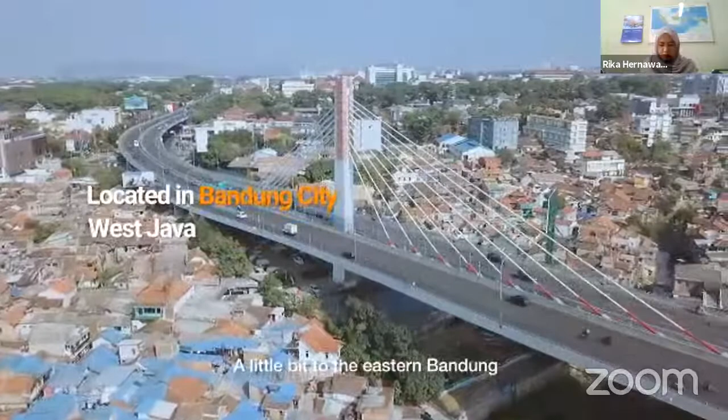A little bit to the east in Bandung, which was once renowned as the Paris of Java, we stand as a single campus, which is the center of a healthy student lifestyle. Our institution was born from honorable purposes and objectives from the founders of the Yayasan Pendidikan Dayang Sumbi, who believed that every one of us should be able to reach higher education and live a better life. The foundation still keeps its promise to provide high quality and affordable higher education for everyone.

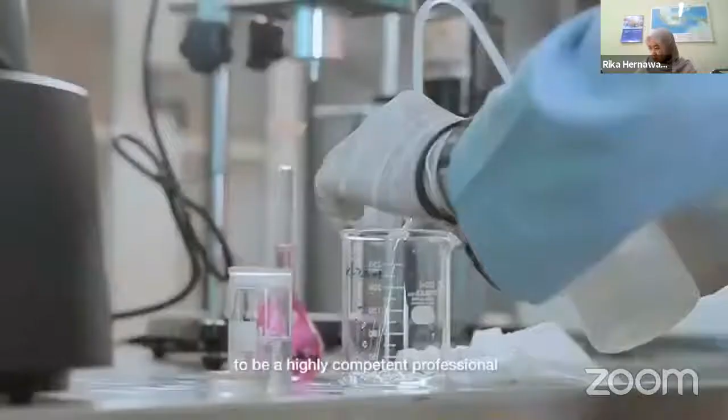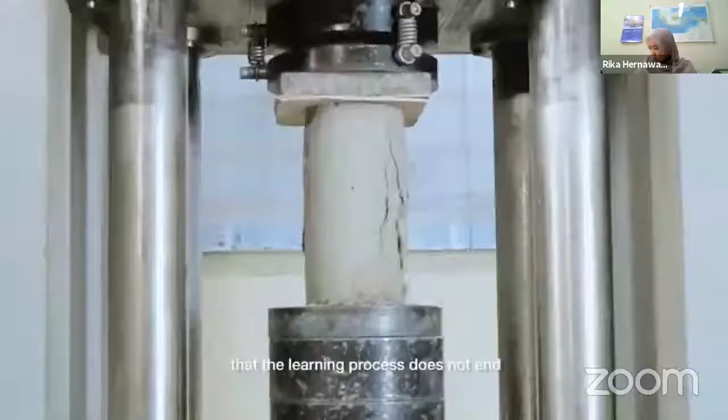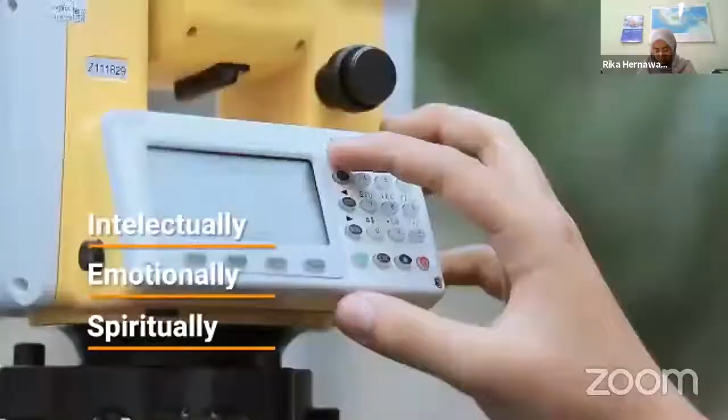Along the journey of education inside our campus, we aim to educate each and every student to be a highly competent professional ready for the workplace. However, as educators, we are aware that the learning process does not end with simply refining professional skills. We also work with our students to grow more proficient intellectually, emotionally, and spiritually. The independent spirit and curiosity for learning of our students and alumni is well known, and therefore they are certainly capable of contributing to society.

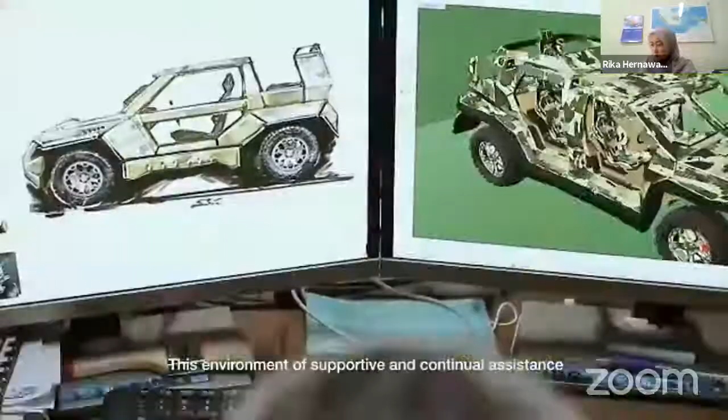We are an integrated learning space which allows every student to be their best, a culturally knowledgeable, passionate human being ready to take on life's challenges. We provide every chance to prove our students' passion in science competition, research, seminars, exhibitions, sports, arts, and every performance to truly express whatever character each and every one of them has. This environment of supportive and continual assistance has been proven to encourage our students in their accomplishment at prestigious national and international championships.

As independent as we are, our doors are always open for everyone who is interested in creating a better education to contribute more to society and grow together. We have a record in collaborating with many universities, government and private offices, companies and worldwide industries through our alumni, friends and relatives around Indonesia and around the world. Today, our alumni numbers over 20,000 people. Our proud alumnus is ready to contribute across the nation and all over the world.

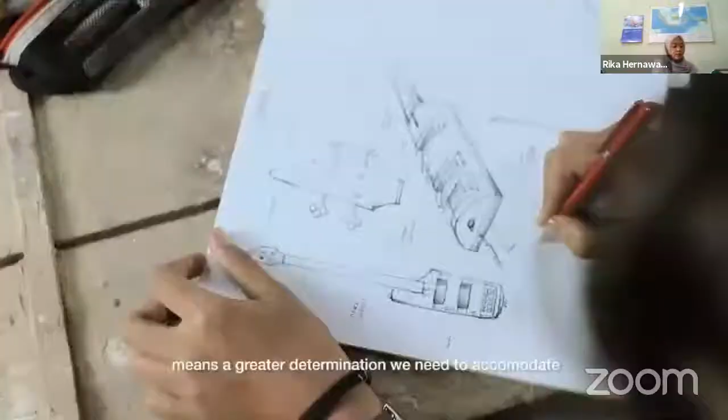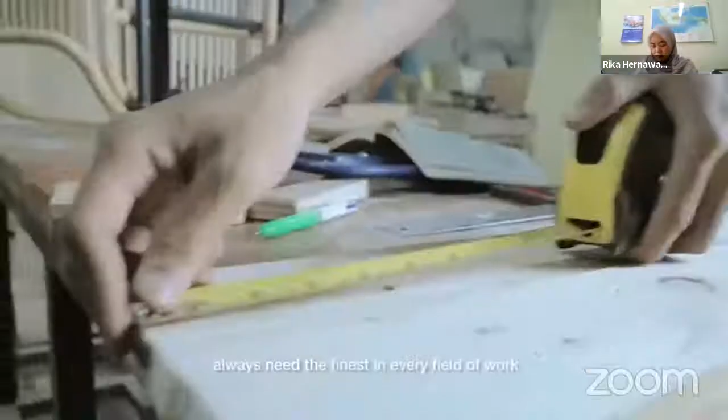The more graduates we have means a greater determination we need to accommodate in order to maintain our qualities. We understand that technology, science, design and engineering always need the finest in every field of work. Welcome to Institut Teknologi Nasional Bandung. We hope for a better mutual connection with you. Together, with your support, trust and cooperation, we can be an excellent and independent higher institution with the aspiration to build better human resources for the nation and the world.

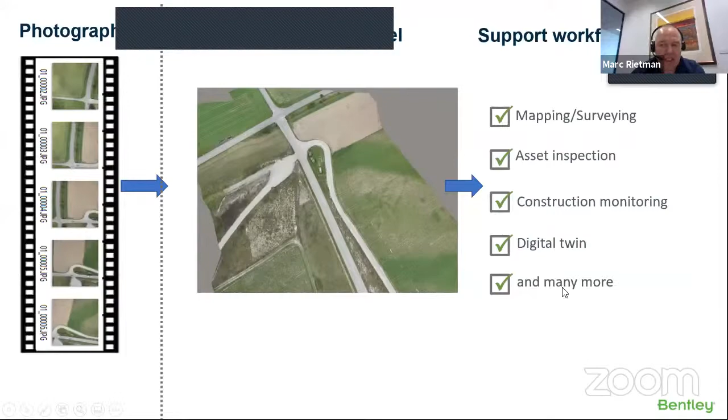In the design phase, for example, if you design an object, you need to understand what you already have there, so understand the existing conditions. Risk management is, of course, a big thing. So you can do the design on the mesh model.

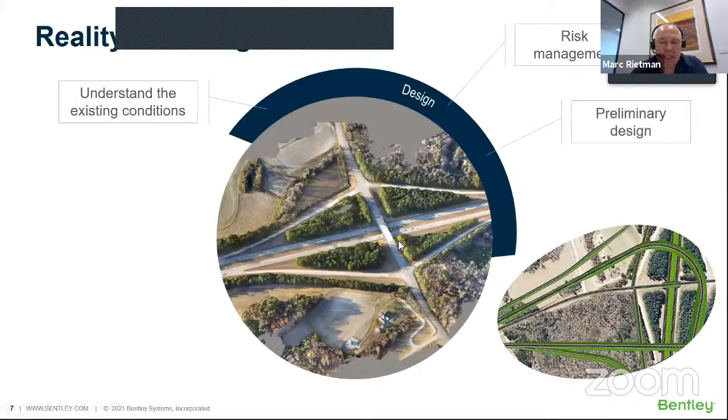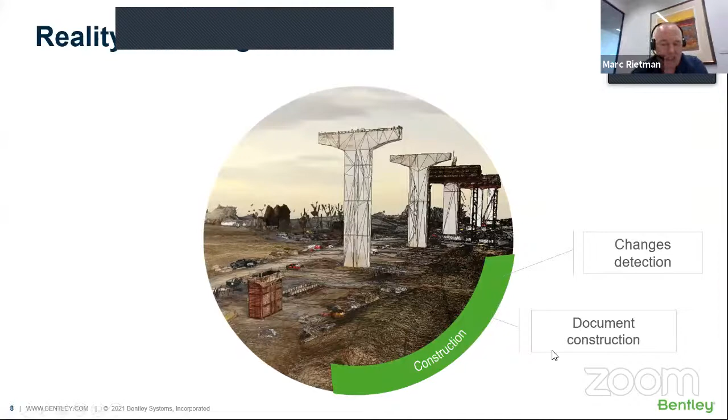In the construction, what I said before, change detection. Is the model really built like what the design was? Document the construction site. And if you go into operations, you can do training and simulation. Later we're going to show some models, for example, how to use it in a HoloLens. We can do virtual inspections and asset management, more on the side of the operation.

So how does the software work? What we do is create photos, and what's important, and we'll discuss that a little bit later, is the overlap from points. So we can do something like this.

We can do statues. People is quite difficult, I'll explain that in a minute. But you walk around an object. If you do it with a handheld camera, capture something from different angles, different rotations, and then you can model it.

Same with a drone. We have a lot of different types of drone capture guides, and it all depends on what you want to model. If you want to do an asset inspection, for example, on a cell tower, that's a completely different way of capturing than if you do a train site or mine site for volume calculations or for design. That's an important thing to understand, and I hope at the end of this session you get it, that it's not rocket science, it's not really complicated.

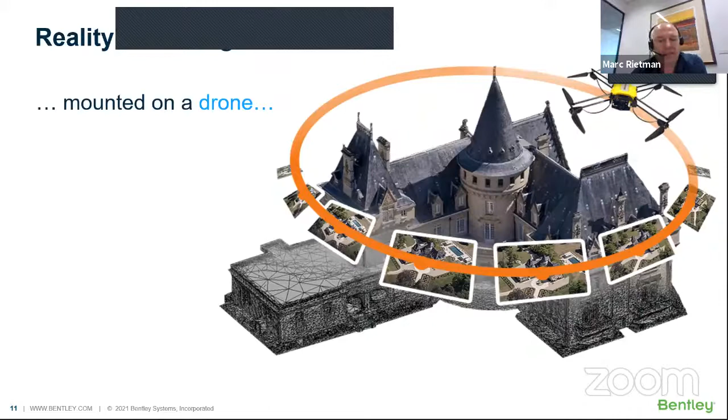You have to follow certain rules to get the model, the output that you desired. So that's an important one. You understand the output first, and then when you understand the output, you go back to what camera you can use. If you don't have a need for a high-end resolution mesh, you can use a lesser, cheaper camera, or you fly higher so you make fewer photos. That's all things you need to consider.

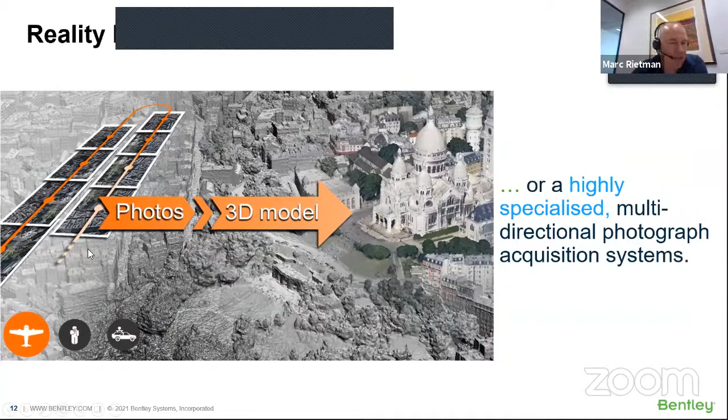And this is, for example, if you do city modeling. We had one of our users recently do a city, Singapore, where they fly around with a certain overlap, certain angles, and create a mesh model out of it. So again, some examples of what devices you can use, and as an output, you get a mesh model.

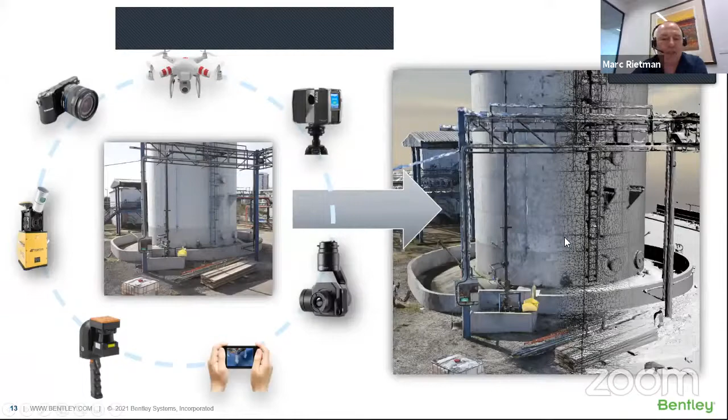Again, on the acquisition side of things, you need to understand how the software works. Basically what we do is stitch images together based on common points and on RGB values. So it's important that you have a texture in the model, and every point that you want to model needs to be in 3 photos. So it's important to have a lot of overlap. If you see holes in the model, quite often it's because there's no data, or a bad texture, which we'll explain in a minute.

Also, the capture technique defines the quality of the model. So you can imagine if, for example, on this side you have only 3 photos, that's maybe not as strong as if you also have photos from the other side, high and low. So the capture technique can make the quality of the model stronger.

So what we do is 3 steps. We have a process we call aerial triangulation, where we import the images, extract key points from them, and then start matching the images together. When we have that, we compare points to points for stitching, and then at the end we create a mesh and texture out of it.

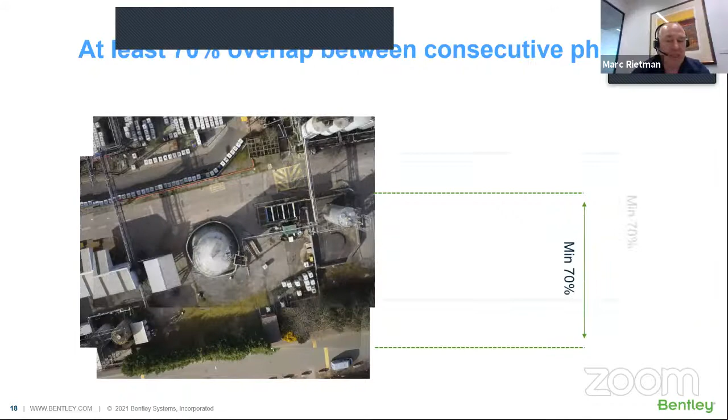So if you capture data, at least what we need is a 70% overlap. We suggest even more, like 80%, but that depends a little on what the capture technique is. If you do nadir images shooting vertical down, at least 70% overlap, though you can do less. I did some models with, for example, 60 and 40% overlap, using traditional survey images for historical mapping.

Government users have a lot of data. They want to create orthophotos or 3D models out of it for archive purposes, and we can use Context Capture for that too. But if you have less overlap, the model looks not really that great, to be honest.

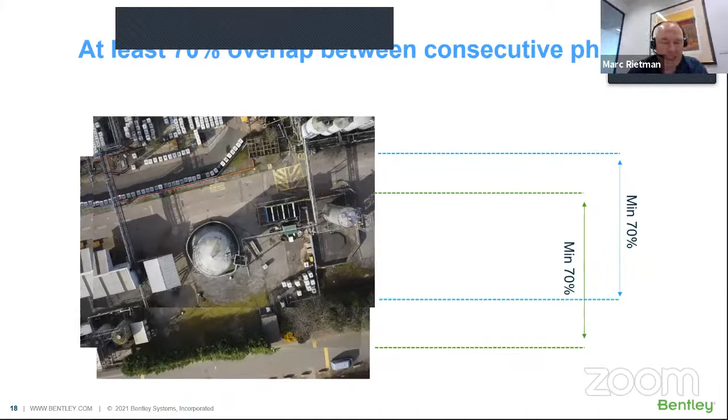What's also important is the angle difference between points. We compare pixel to pixel, but a pixel is not a point, it's a flat surface. So you can imagine if you have a point here, the flat surface on this image is different from that image. If that angle is too big, the software can't really stitch it together.

All of this comes with experience, but there's also something we can help with. We have a lot of different types of capture guides, and we can guide you through that process to better understand the issues you can have here.

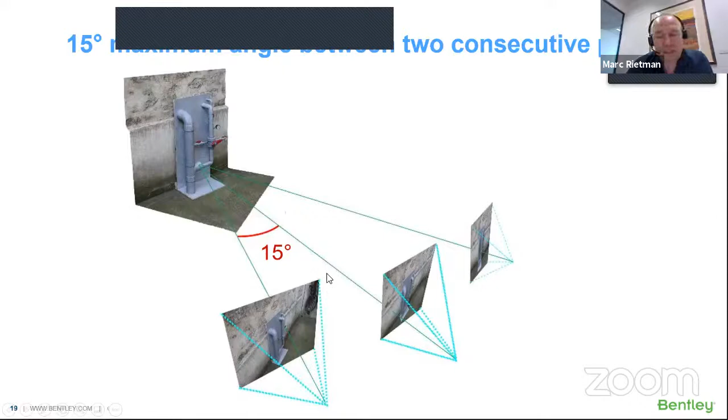An issue can be the distance to the object, the resolution difference. If you shoot from far away a point is, let's say, 5 centimeters, and from close by it's 1 centimeter - the same point, but the software can't recognize it as the same point. So what you need is some steps in between. This happens with the car example, but also quite often with buildings. If you fly really high, say 100 meters with a Phantom 4, and then go down to 30 meters, the software can't stitch these images together. There is a way to do it manually, but you try to avoid manual steps.

But if you do, for example, buildings, the best capture technique is still to orbit around the object, going around and shooting from different angles.

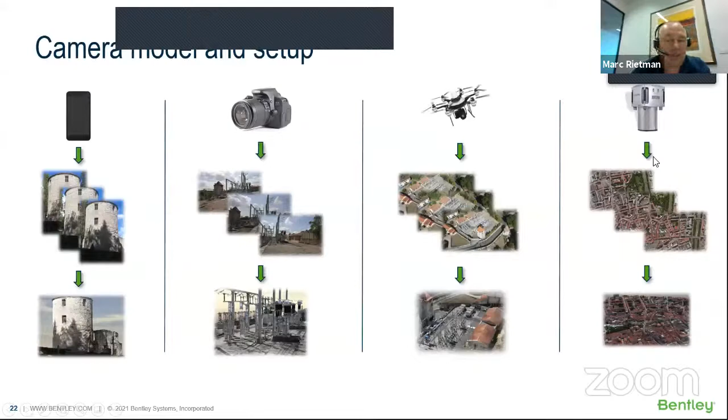So considering the time, the capture part is quite quick. This is something we normally do in a 1 or 2 hour workshop or training. There are so many different capture techniques and ways you can use to capture something - it depends on a lot of factors. So that's something maybe we can cover separately if there's more interest.

What I want to do now is show some examples from models. I've got some videos where I captured these models, so I can also show some live, considering the time.

This is a city model from one of our users, Aerometrex. Bentley bought Acute3D, the French company, in 2011 - well, actually we bought it in 2015, but the software started in 2011. This user was already using it before Bentley, I think since 2012. So they are really experienced - one of our best users doing this type of modeling.

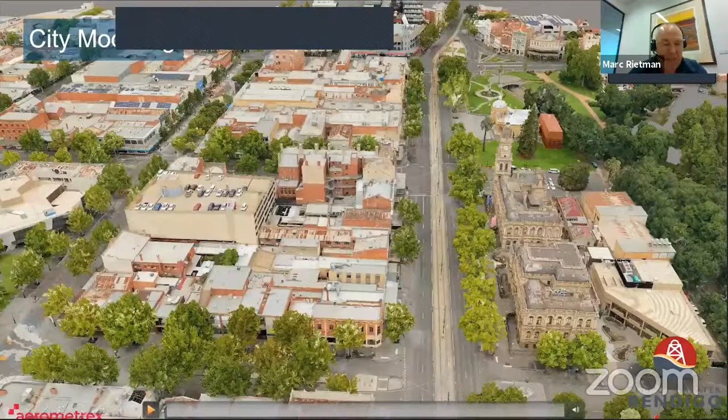When I start playing the video, you'll recognize why I think that. First of all, you hardly see any cars in here. What they do is process the data, take it out, clean it up, and reprocess it again. That's quite manual and time consuming, but it makes the model way better - the quality is more photo-like than what you'd get from a typical reality mesh.

This one is also available online, so if you Google Aerometrex and Bendigo, or Pau in France, there's also one of the models. They have a lot of stuff available online.

The way they capture in general is with a helicopter instead of a drone, so it's easy to get access above cities. You hang out of the helicopter, shoot a lot of images, plus handheld capture. You can use devices mounted on a car, and in general Aerometrex is just walking around with handheld cameras shooting, then later merge the two data sets together.

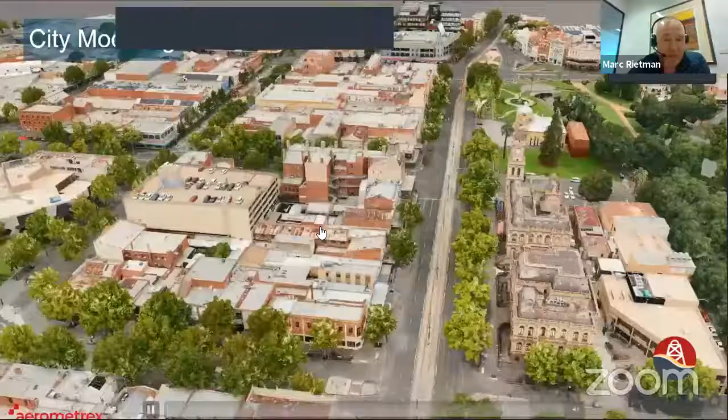What they are using this for is brick replacement. They want to do inspections off-site from the brick, and if it needs to be replaced, they can measure it - it's really scaled. They use a lot of ground control points for scaling, then prepare the data off-site and bring it on site for replacing the brick.

So this is a bit more high-end model capture, a different kind. This is quite common for a lot of these heritage users to get a quality like this, and also even doing it inside the building.

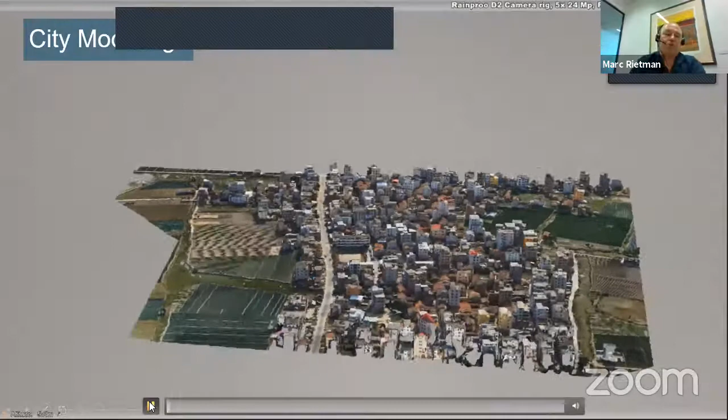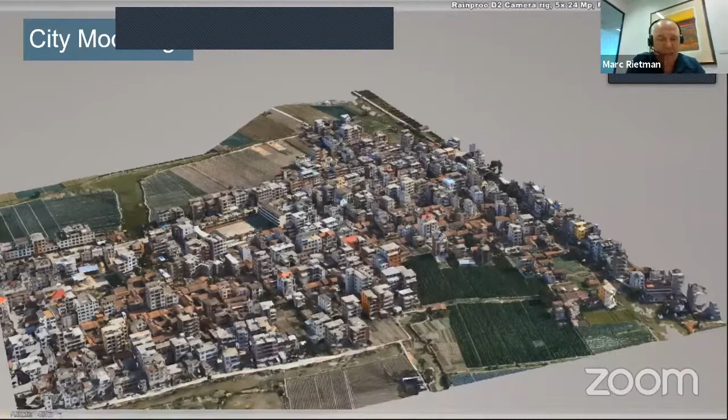So this is another example of how users are using ContextCapture. This model was created with a camera rig, so we have 5 cameras on a drone. You fly up and down like a normal nadir flight, but you shoot 5 photos at the same time - one down, one left, right, forward, backward. That's a camera rig model.

In this case, you can see it on the top right, it's a 5 times 24 megapixel camera, and they're flying 105 meters high, so the GSD is less than 2 centimeters.

If you want to do city modeling, you can do it with a single drone with a single camera, but then it takes you way longer, and of course there's more risk - something you forgot to capture. With a camera rig, you have less chance to forget something.

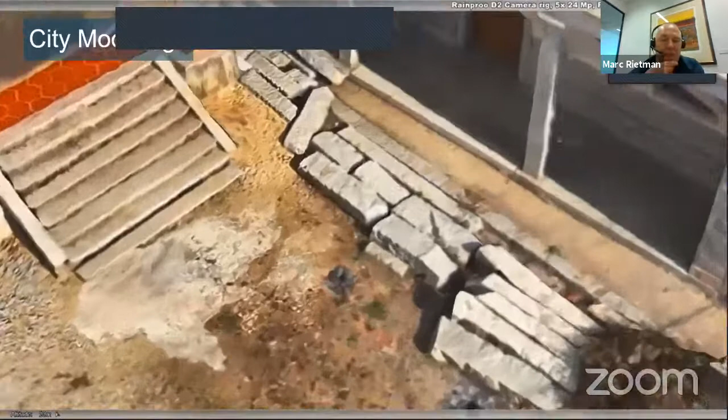The main thing is you do it basically at the same time. If you do it with a manual camera, you have to fly forward, backward, left, right, and do orbits, and the shadows will really move - you see really hard shadows here, in the colors. That's the advantage of doing a camera rig: you basically capture it at the moment that it is, you don't combine different times of day into one model.

Another use case that's really popular at the moment is doing cell towers. For inspections you need to climb up, you have to turn the tower off, and you need at least 2 people in Australia. In a lot of parts of the world it's just too expensive to do it all manually, so you can fly with a drone instead.

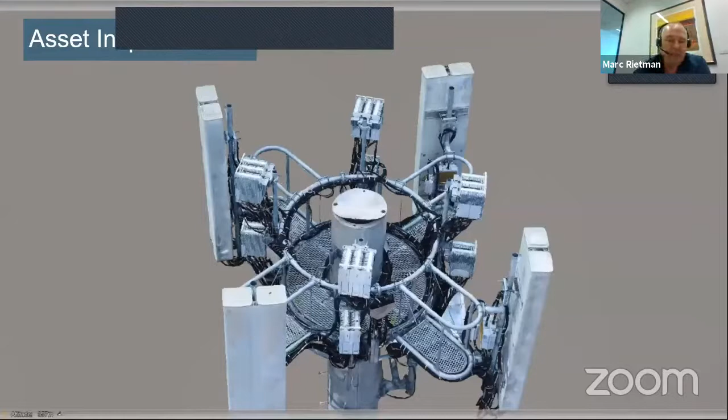This one I did myself with a Phantom 4 - 1400 images, flying around at different angles, and you get a model like this. This is something we are really good at with the software; we optimize the processing so in less than 10 or 11 hours of processing, we get a model like this.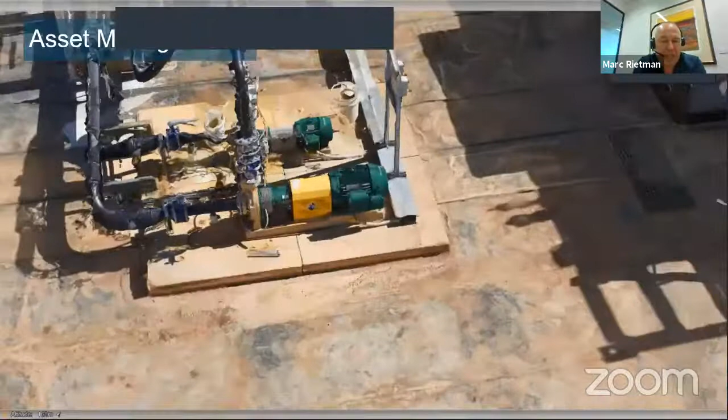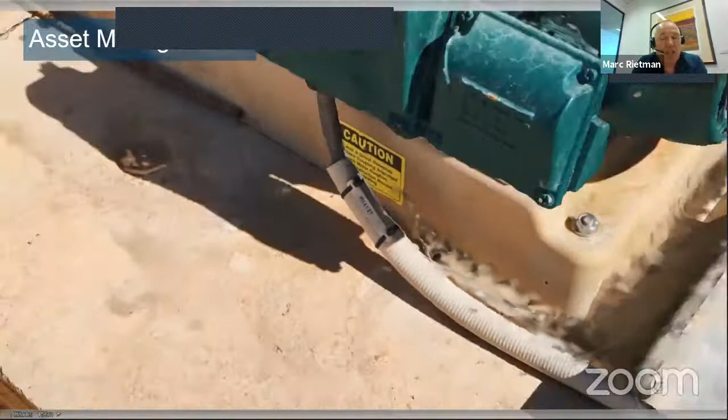This is really a digital twin example, but users in the office need to read these kinds of numbers and tags on the pumps. They don't really need the high quality model over the whole plant site - we only do the objects that they really need, which saves processing time and capture time.

This is an important thing, but if you want, we can do the whole plant at this quality. Let me zoom in - you can see, you can read what's on that object. This is really a digital twin example where people in the office want to see what's there.

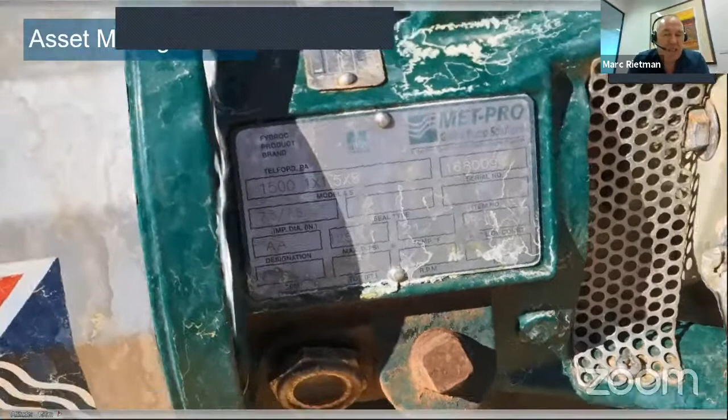We can attach sensor information here, or information about the pump, so if you click, you can see the maintenance forms.

There's a combination of drone and handheld capture. So flying a drone, flying handheld, capturing data with handheld, and combining it. There's a certain workflow that we can help you with to train on this. It's not so complicated as long as you can see points in both objects - that's important to understand.

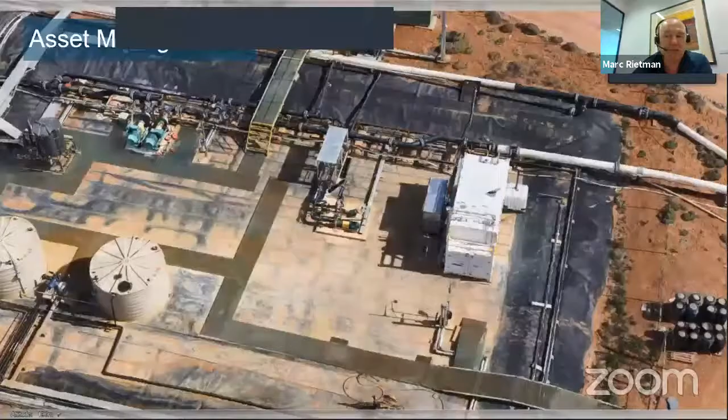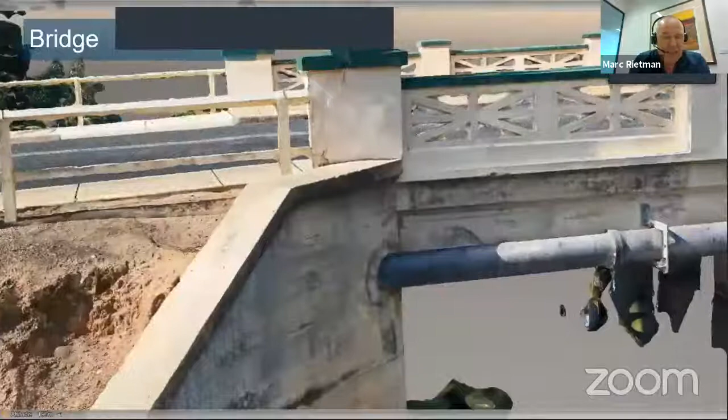This is an example of a user who never flew a drone before. He did it with a DJI Mavic Pro - flew the drone but never really captured data before. So this is his first model, and I was quite impressed with the Mavic Pro 2, a 20 megapixel camera, doing a bridge for asset inspection. We see a lot of high-end models on bridges, even underneath. But this is just with a relatively cheap, small drone, nothing special. The advantage is the camera faces forward, so you can even shoot upward.

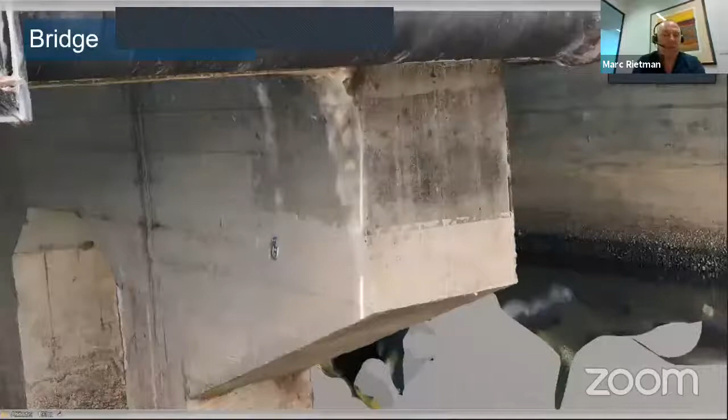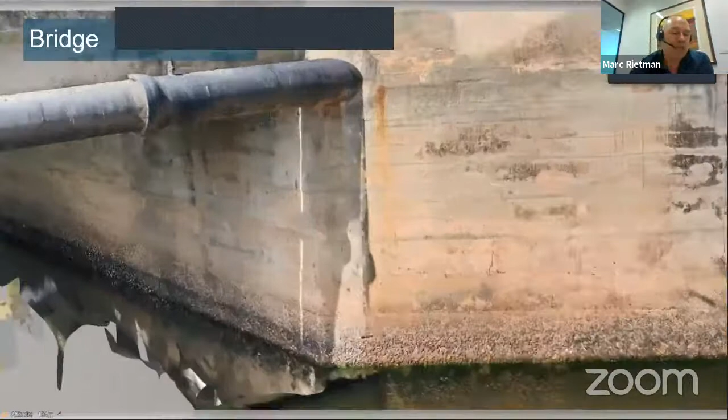So what you see, the green stuff is a little bit of noise - I should have removed that data. I processed it for the user but didn't clean it up. Normally we would clean up the model, remove objects you don't need, and it looks much nicer. But I think it's quite impressive for just a Mavic Pro doing bridge inspections.

In Australia, you have a lot of rules for health and safety, so capturing this with a drone saves a lot of money and time. Something like this - you don't really need a 42 megapixel camera to create a really good model.

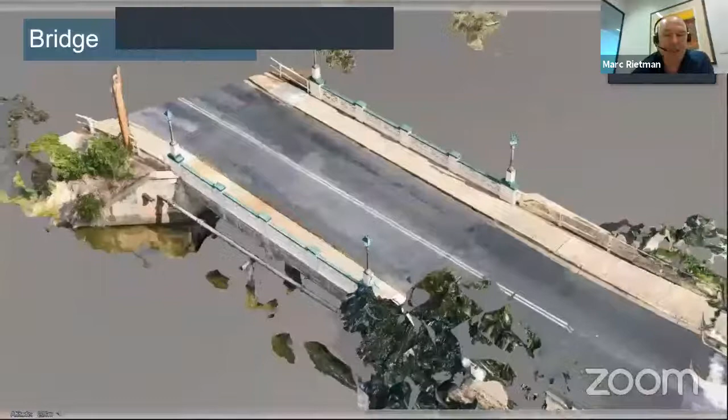This is another example, from a mine site. This was done with a Wingtra, a fixed wing drone. They're flying at, in this case, 100 meters high, but only with the camera facing down, so the side of objects isn't captured that great.

What I show in this example is that you can measure distance. This is just in the Context Capture viewer - you get this with Context Capture, and it's a free viewer that everybody can use. You give out a model and they can download the viewer from our website and use it. We can also do simple volume calculations, for example - you see something like this, just in the viewer.

For mine sites, we also see a lot of use cases for geotechnical inspections. If there's an accident on the mine - rock coming down or something - the geotechnical people want to know why. You can create a high resolution model so they can measure angles and that kind of stuff.

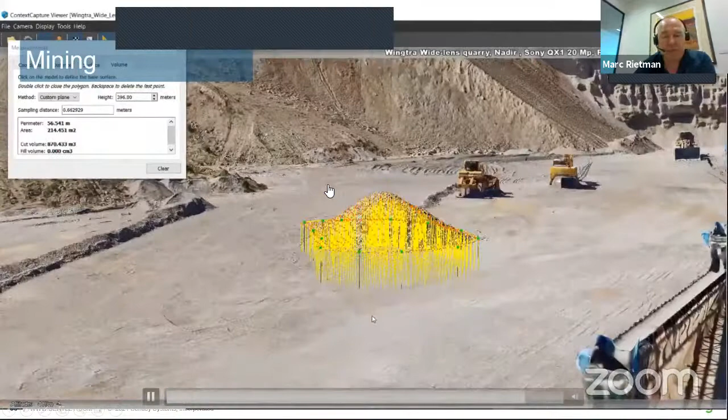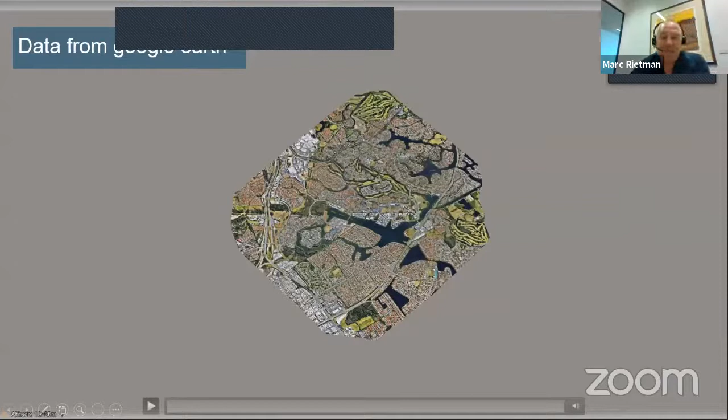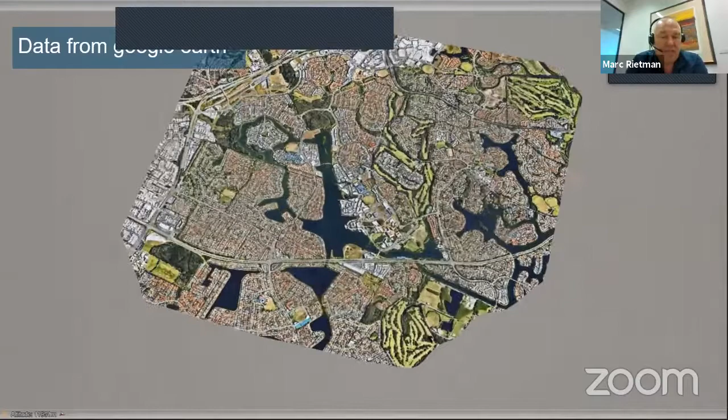This was a little more playing around for me. This is the area where I live, the Gold Coast in Australia, and this is also a university. What I did - since we don't have a high-end mesh - I went into Google Earth and created print screens, basically just from Google Earth, and put it into Context Capture. For students from this university who do modeling over an area but don't have an overview project - they just have a small building or so, but want to fit it in a real environment - that's something we can do now.

We can create a model like this from Google Earth. It's not the best resolution, of course, but then you can merge it with, for example, a high resolution drone model, so you get more of an overview. It's cheap and easy to do.

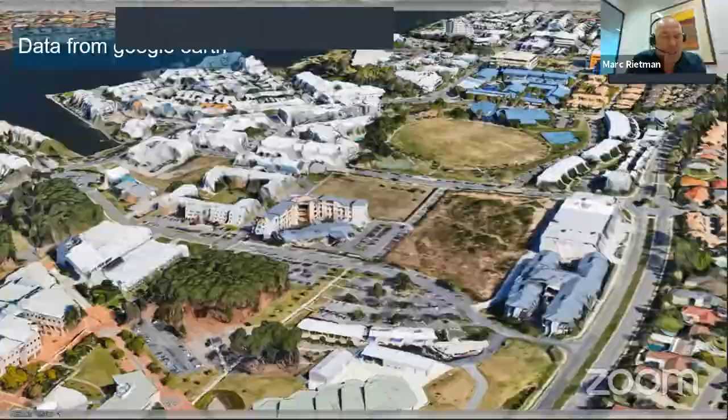I tried to do a Google Earth model from Bandung, but Bandung in Google Earth isn't in 3D - there are only some buildings in 3D, so it didn't come out really well.

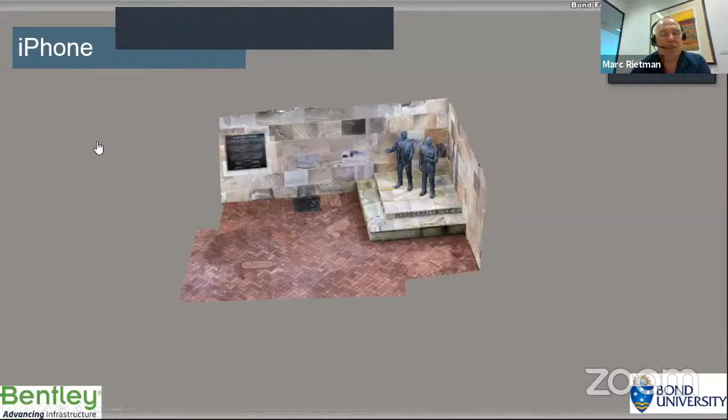Another thing is doing things with the iPhone. This is that same university near my house. What I did is I was walking with the dog, and with the phone we just captured some images - this is just from an iPhone.

Originally it was not georeferenced, but I used some scale constraints - measuring certain objects, then telling the software what the distance is and reprocessing it. You get the model scaled that way. And that's just with a phone, nothing special - just walking around shooting photos with a certain overlap and different angles, and you get a model out.

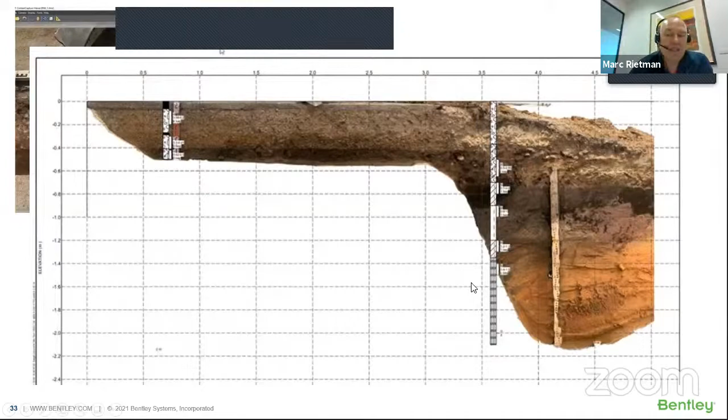From this one, I don't have a model, but I think it was really interesting what one of our users did. They use software from Bentley called gINT, that's for boreholes, for road modeling. So they want to extend the road, they open a certain area, they go in with a model, and they have measurement tools where they start calculating this type of stuff. But what they do now is create a ContextCapture model, create a side view, and load it into that software so the user can see on the geotechnical side how it is in reality instead of just numbers in the software. I think it's a really interesting use case. Considering the time, if somebody wants to see another type of model, I've got more I can show, otherwise we just show some examples of how to use the data.

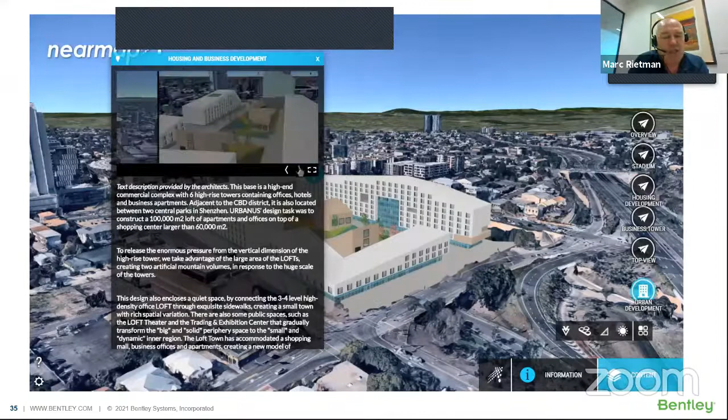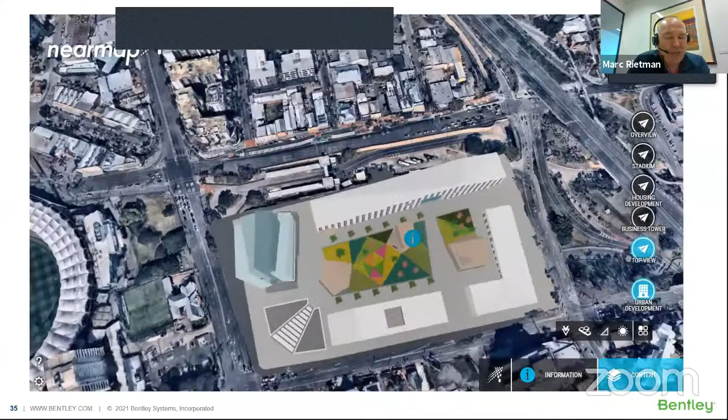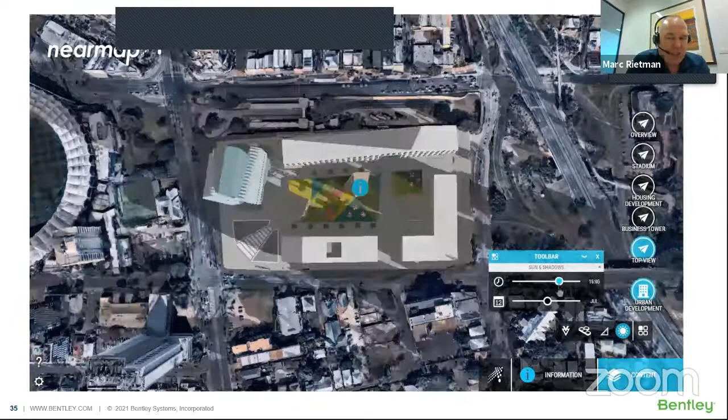But if you turn it off, then we have zoom views - we can guide users through the process, so we have zoom locations. You click on it, you can do shadow analysis here. This is for city modeling, but we have many use cases for Open City Planner. It's more our front end for digital twins, so you can do measurements, of course.

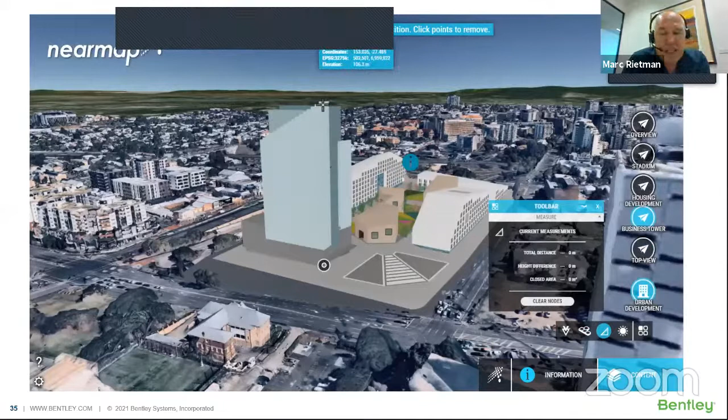This comes from a Scandinavian product, Agency9, which Bentley purchased I think 2 years ago, and in Scandinavia a lot of cities are using this. For city modeling, for example, if you want to ask your users, the public, which model they like, you can have multiple models at the same location. The user can turn it on, turn it off, and can even leave comments or information on which one they like, for example.

And because of shadow analysis, you can of course make the sun come up or disappear. So this is Open City Planner.

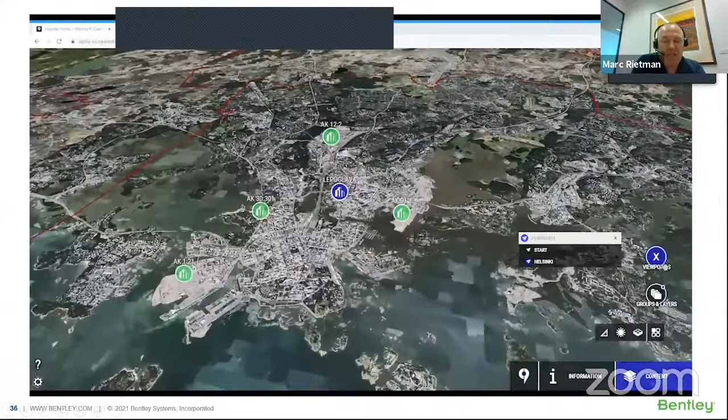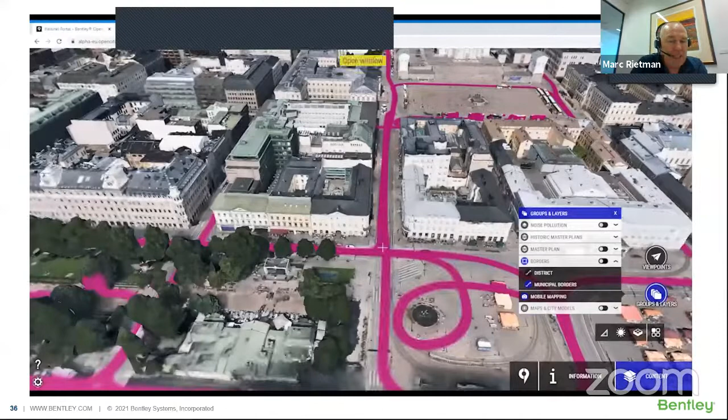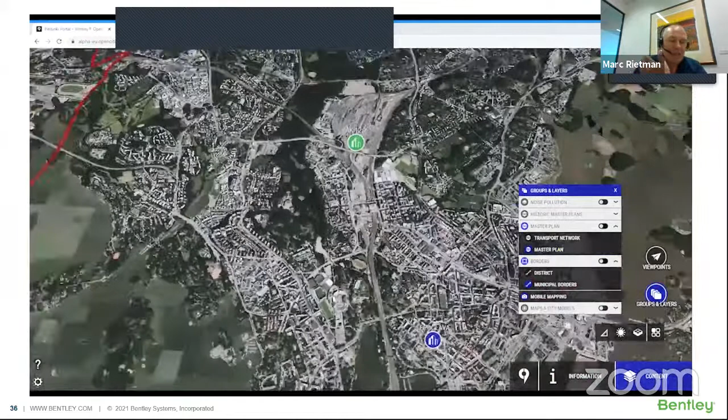This is also Open City Planner, but this is for the city of Helsinki. They combine it with some other data, with GIS data for example, so you can do things like web services. You can load data from a spatial database, but we can also load data from another application from Bentley, that's Orbit - a point cloud viewer. So this is data from a mobile scanner with 360 images, and we can link it and load that data in Open City Planner, so the user has one interface for seeing all the information he needs.

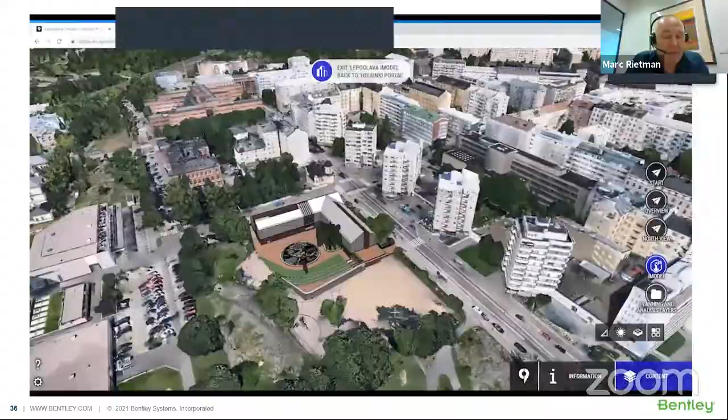You can create portals - let's say you have the whole of Indonesia, you zoom into a certain object and then it loads that project from that city. This is like what we do here as a portal. So in the portal you can turn a model on, for example it could be a Revit model, it doesn't have to be a Bentley product. This is natively reading Revit models, and then you can have some information about that project.

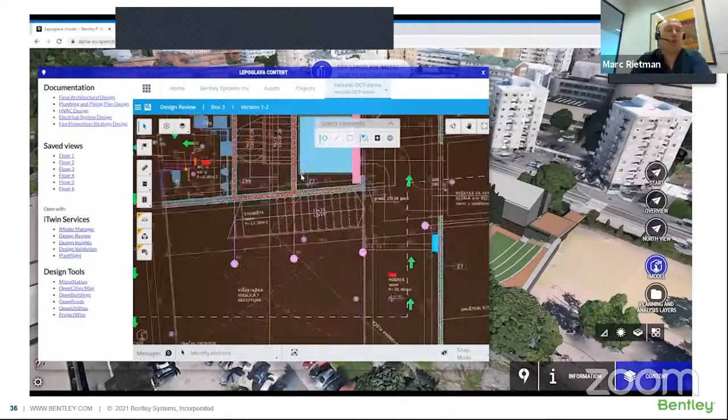So this is also, we can use this as an interface into design modeling. If you have other applications, you can click on it and see all the design data from that object, with all the attributes etc. So you use it more as an interface to that object, to finding information about certain objects.

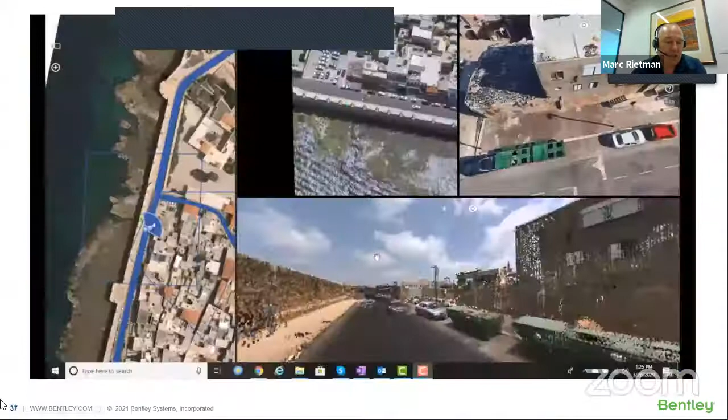So this is Orbit itself, this is the Orbit viewer. Orbit has different applications, one of them is feature extraction. So we can load a point cloud and we can do automatic feature extraction.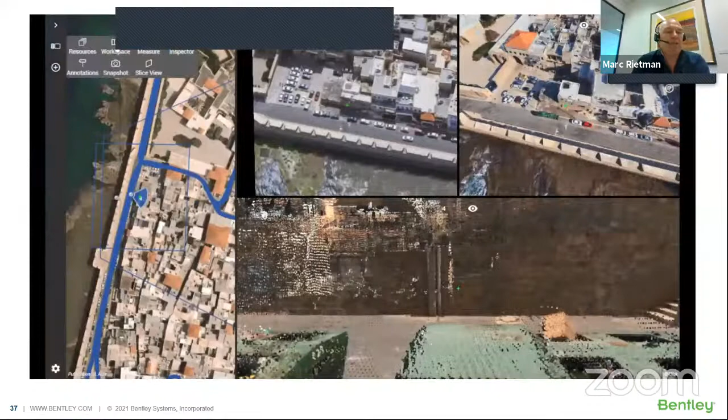Something we can do with machine learning semi-automatically, but this is the viewer bit. This can be on the cloud, can run in your own cloud, in your own environment, and we can combine 360 images, point cloud, mesh models, ortho photos. The user can have comments, and for some you can do annotation.

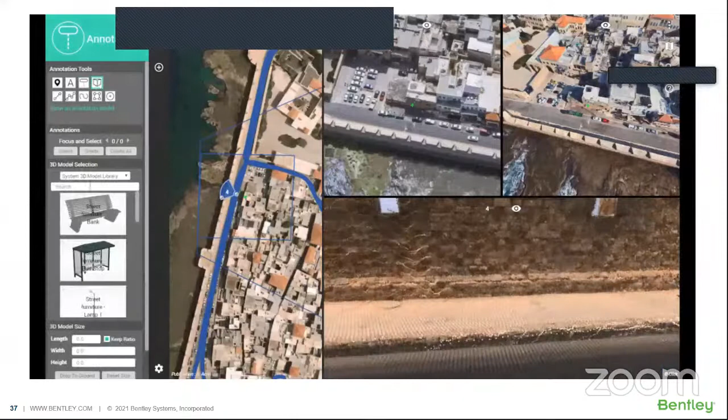So if you want to place an object here, let's say I want to place an object here, you can do it from search from a library. You want to place an object, and you can view that object then in the different views, and then users can have comments on it, can create print screen, share it with other users.

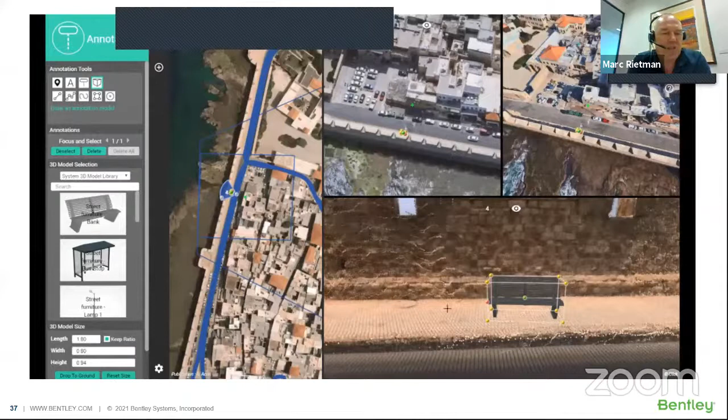So this is more a technical viewer than, for example, OCP. This is a little bit more complex, but it's probably more for the technical users. You can create a snapshot and then share it with someone.

So this is the Orbit Cloud Viewer, and in this case we also can load the mesh model, and then you can combine the data.

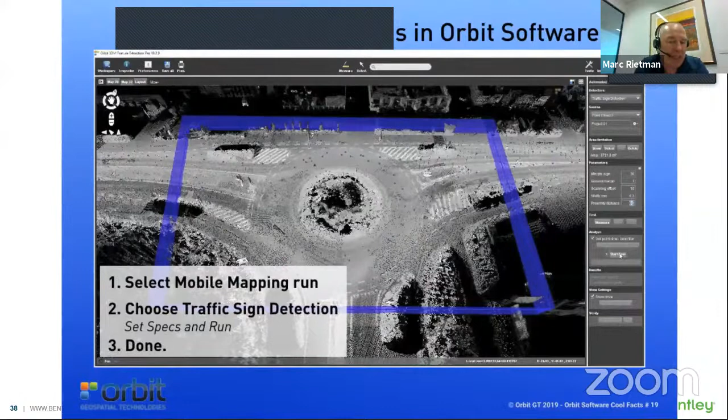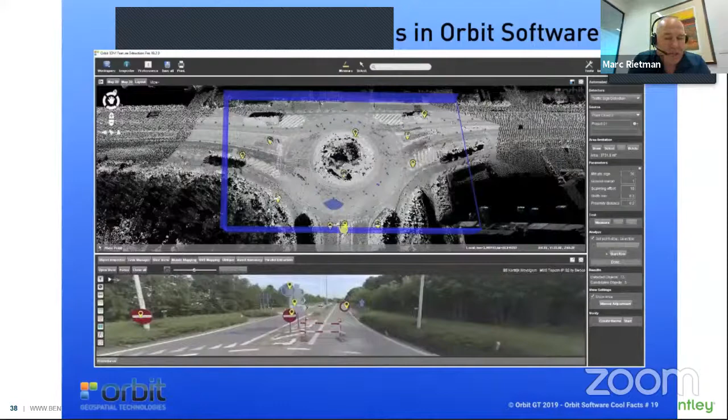So the Orbit feature extraction tool, what I just said before, this is also an interesting one. You can load your mobile mapping data or your static point cloud data. In this case, if you want to do automatic traffic sign detection, it's fully automatic. We make it a little bit shorter because it's a heavy project for your graphic card. But then you can identify what type of object you have, and you can do modeling from the lines, roads, that kind of stuff. So this is the Orbit feature extraction tool.

That's part of the Orbit product line. Another interesting one, and this is a really simple model example - this is ConceptStation, a conceptual road design tool. This is already 2 or 3 years old.

We did a webinar at a golf course, and we captured some data with the drone, and gave it to my colleague, and he designed a roundabout on that area. You select an area where you want to work, and set things like the coordinate system - this is in Australia, so MGA Australia.

What he does is load that model that we created - a really simple, a bit more than, let's say, an idea capture. He loads it in and starts doing conceptual road design on top of that mesh model. So you see here the 3D mesh model, and then based on a library we have, we can add types of roads.

I'm not sure about Indonesia, but for most countries we have these libraries. We can select what type of road you want to place. You pick a profile, then select an object, snap to it, and it creates that road.

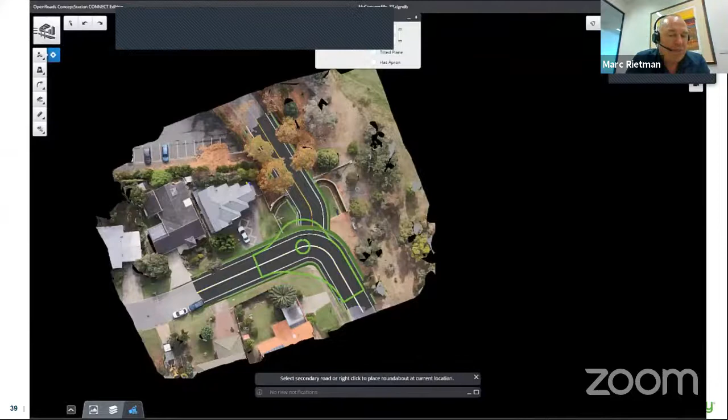Now in this case, he wants to create a roundabout there, so he has to make another road towards, in this case, the golf course, doing something like this. Now they are connected, and he says okay, I want to create a roundabout with certain values, then you place it, connect both of them together, and you get your roundabout.

This conceptual road design can also give an estimate price of what it's going to cost based on earth volumes, for example, and distance from the material - but this is all in 3D. So this is overall ConceptStation, and we can also load the data into our design applications like OpenRoads and OpenBuildings.

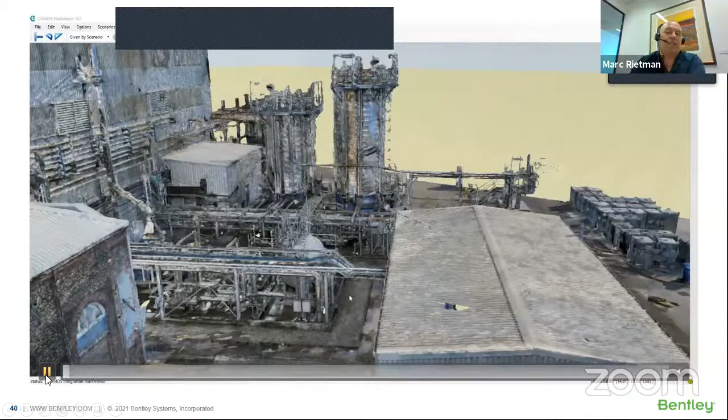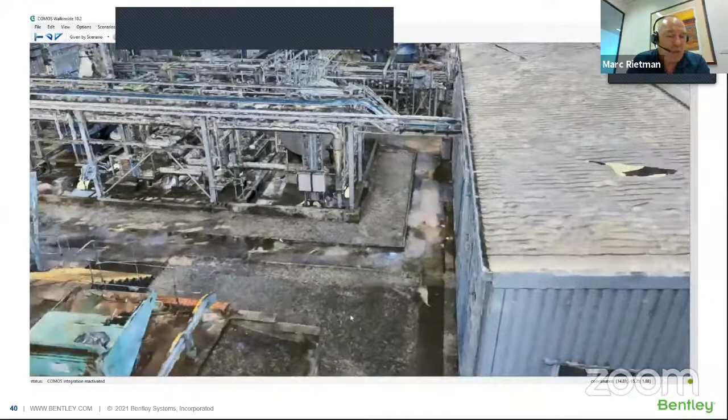Another use case - this is not an application from Bentley, but a Siemens application where you can do virtual inspections, where you can basically walk through your plant. I think it's COMOS, the application where you can walk around. This is a mesh model created with ContextCapture, and then you can walk around seeing objects, select objects, even see attributes from it.

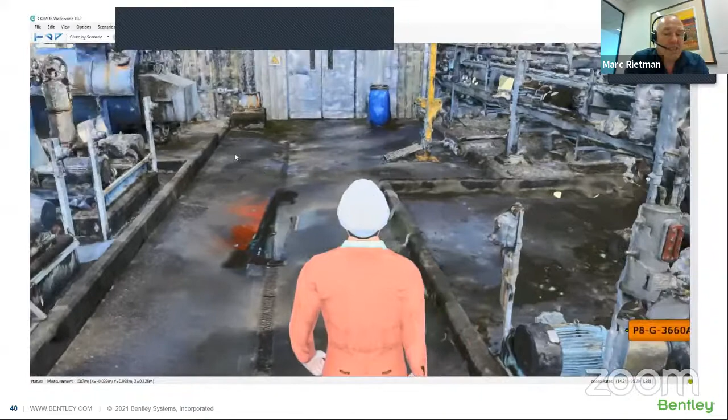So you see, if you walk around and click on an object, you can see what it is. Let's walk around a bit. So this is an external application where you can jump to certain points and see information about objects.

So this is what we do a lot nowadays, creating reality mesh models from plant sites, similar to this, with different camera systems, handheld camera rigs, for example.

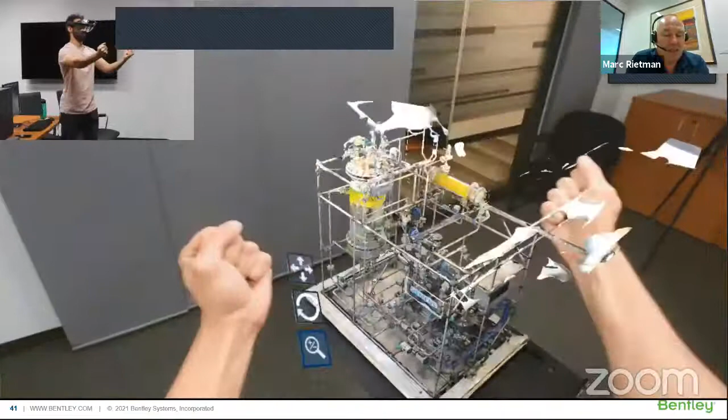This is another Bentley application, a HoloLens, where you can load your 3D mesh model in a HoloLens. This is in the office, where you can view through the model and do inspection. This is already an application Bentley has available, the HoloLens. You need to have a HoloLens, of course.

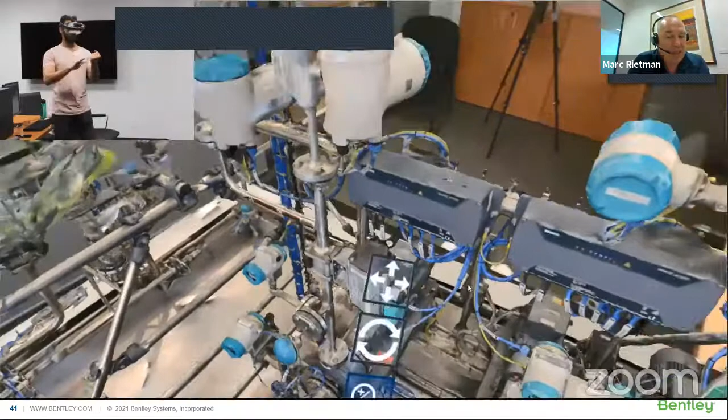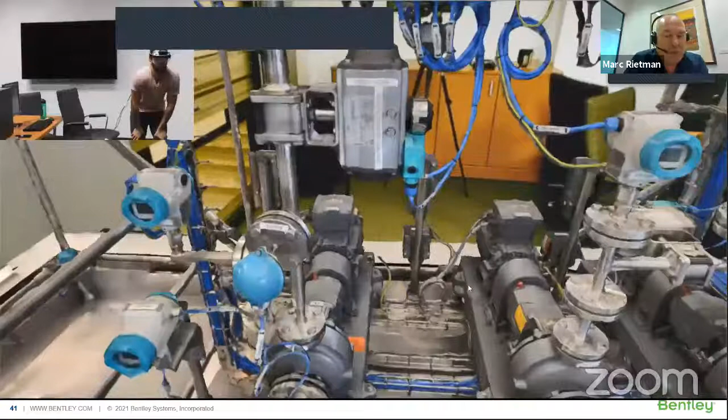We also have some movies online about what we do, really high-end bridge inspections with this type of HoloLens. It's really cool. Somebody standing in the kitchen jumps to the bridge and you see you're basically under the bridge.

We can link original images, so you click on the mesh model and see the original images with information about the antenna. We are developing our AI, but it will also come available in Context Capture, so you can do basic antenna detection in the next release.

But in the next releases, we'll do more with machine learning, road detection, and then we can even do building detection and so on.

So this is the stuff I wanted to show from Context Capture. I hope I stayed within the hour. Are there any questions, or do users want to show another type of model? I understand this is a high level overview, so we didn't really go into the software and so on.